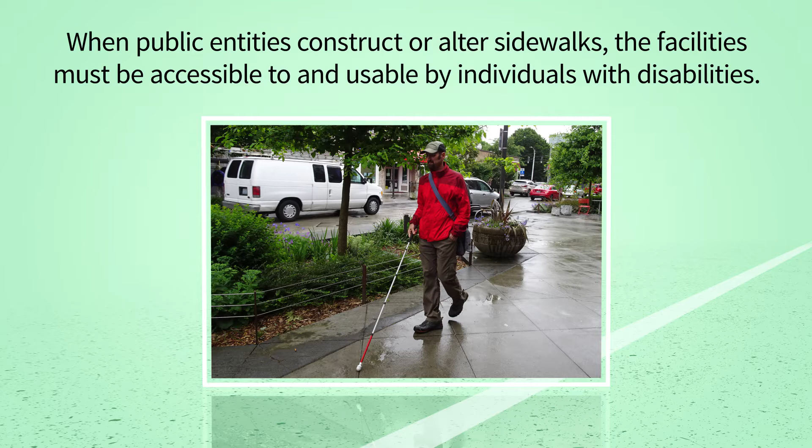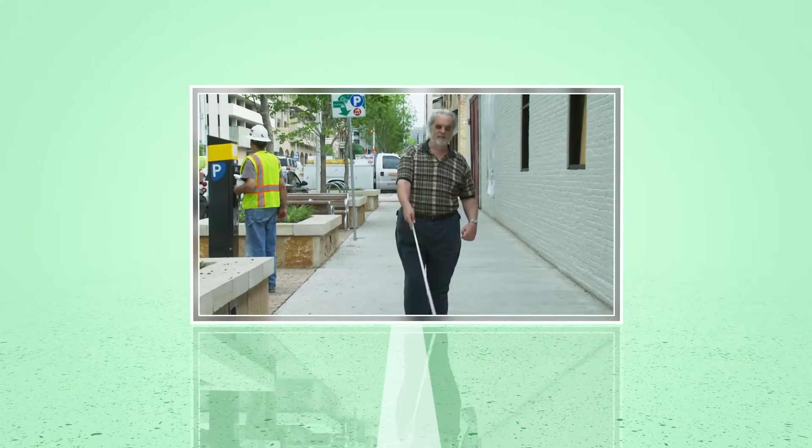When public entities, such as state or local governments, construct new sidewalks or alter existing ones, the ADA requires them to be accessible to and usable by individuals with disabilities. The ADA also requires the maintenance of accessible features so that accessibility is retained over time. ADA Title II regulations require that persons with disabilities are able to participate in state and local government programs, including sidewalks in the public rights-of-way and pedestrian crossings at intersections.

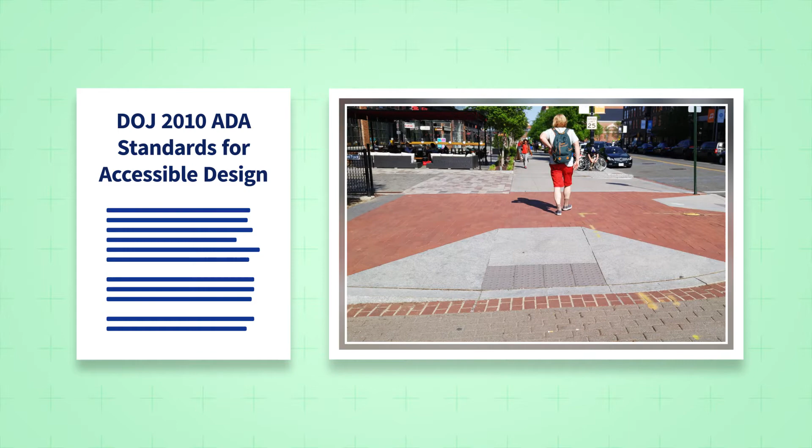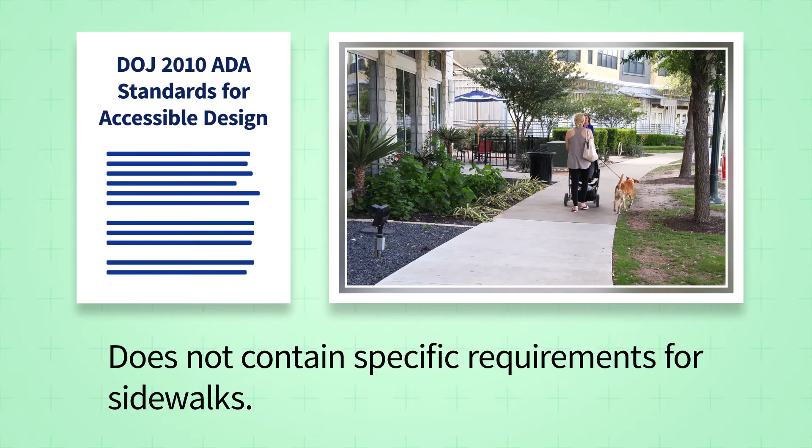The 2010 ADA Standards for Accessible Design issued by the U.S. Department of Justice, or DOJ, contain specific requirements for curb ramps at intersections. The ADA standards do not contain specific requirements for other elements in the public rights-of-way, such as sidewalks. However, under Title II of the ADA and Section 504, public entities must ensure that all their programs, activities, and services, including their public rights-of-way, are accessible to and usable by individuals with disabilities.

In the absence of specific technical standards for the other elements in the public rights-of-way, public entities have some degree of flexibility in determining how they will comply with the general accessibility obligation under Title II of the ADA and Section 504. Public entities may turn to different resources for guidance when determining how to ensure accessibility. For example, a public entity could look to the ADA standards for guidance on issues that arise in the public rights-of-way, such as sidewalks.

As another option, public entities may consider the U.S. Access Board's 2011 Proposed Accessibility Guidelines for Pedestrian Facilities in the Public Rights-of-Way, or PROWAG, which have been proposed as minimum guidelines for facilities in the public rights-of-way. Because these proposed guidelines have not yet been finalized by the Access Board and adopted by the DOJ or the U.S. Department of Transportation, they are not enforceable standards.

The draft guidelines may, however, provide a useful framework to help public entities meet their obligations to make their programs, services, and activities in the public rights-of-way readily accessible to and usable by individuals with disabilities. For that reason, the Federal Highway Administration considers the draft PROWAG a best practice for the design and construction of sidewalks, pedestrian facilities, and other elements in the public rights-of-way. There are 5 key elements in PROWAG that pertain to sidewalks: width, cross slope, grade, surface, and protruding objects.

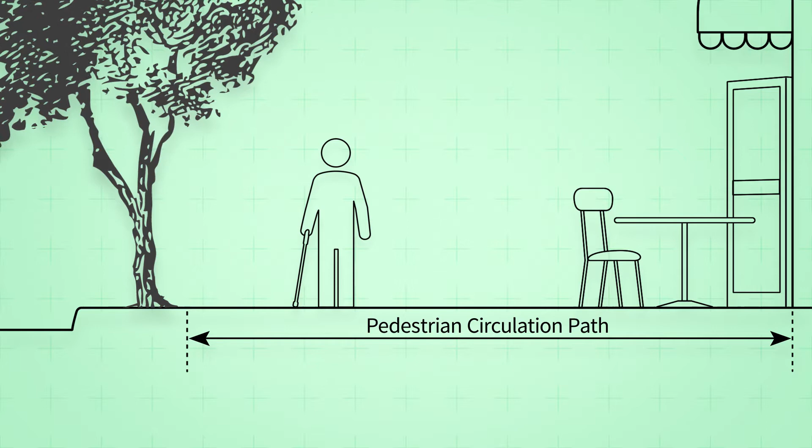A few of the sidewalk provisions of PROWAG, particularly those that address accessibility for individuals with limited vision, pertain to the entire pedestrian circulation path, which is the full width of the sidewalk that provides access to public transit, commercial centers, entertainment venues, and other places where people want to go. All the sidewalk provisions pertain to the portion of the pedestrian circulation path known as a pedestrian access route, or PAR. The PAR provides a continuous, unobstructed route for pedestrians with disabilities, including individuals who use wheelchairs or other mobility devices.

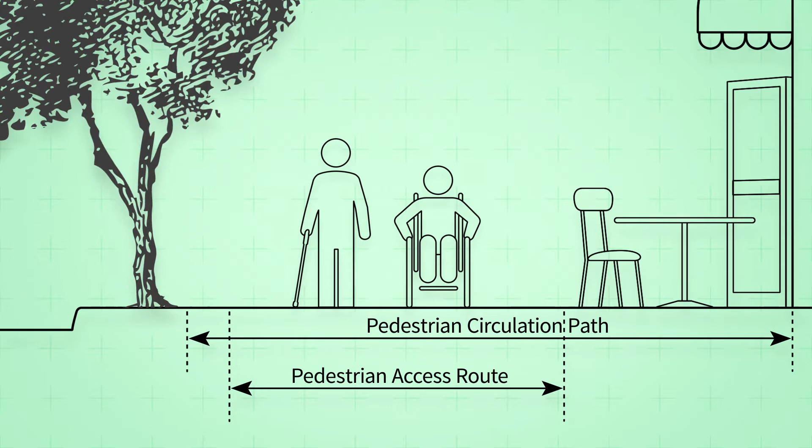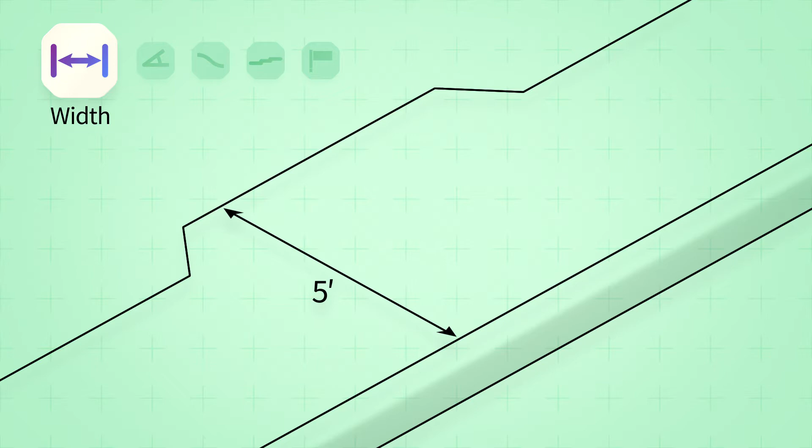To begin, the PROWAG proposes that the PAR must be at least 4 feet wide to accommodate individuals using a wheelchair, crutches, or walker. This width is measured excluding the curb. A 5-foot wide passing area should be provided at no more than 200-foot intervals. For a uniform appearance and ease of construction, the Federal Highway Administration recommends a minimum sidewalk width of 5 feet. Wider sidewalks are preferred to accommodate crowds, to allow space for 2 wheelchairs to pass each other, and when the sidewalk is located immediately adjacent to the curb.

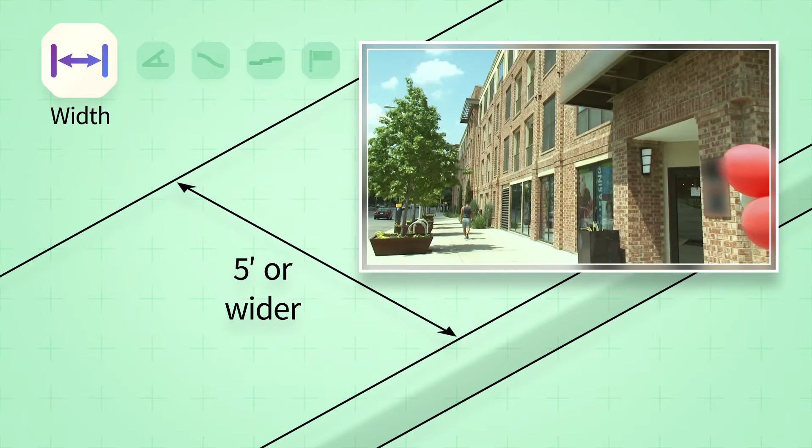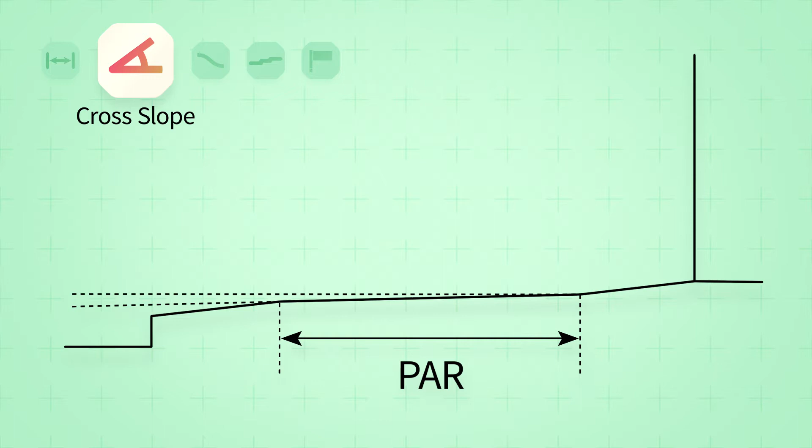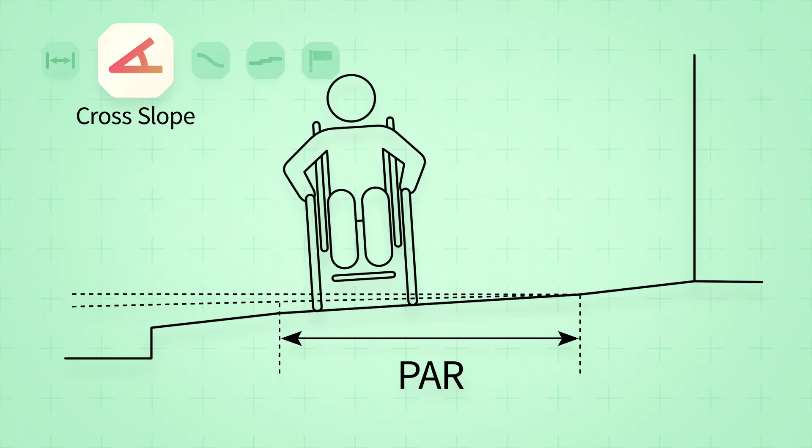Next, the PROWAG proposes that the maximum allowable cross slope of a PAR is 2%. The portion of the pedestrian circulation path outside the PAR, however, may have a steeper but generally uniform cross slope. While some slope is necessary for drainage, a cross slope steeper than 2% causes some pedestrians with disabilities to veer to the downhill side, making travel more strenuous for individuals using manual wheelchairs, crutches, and walkers.

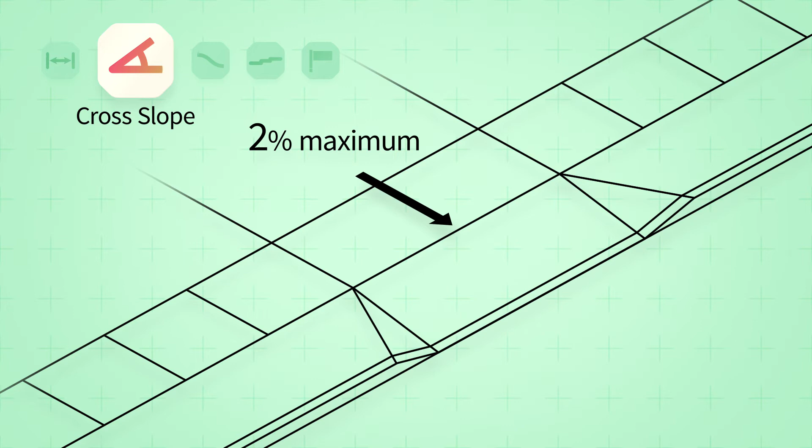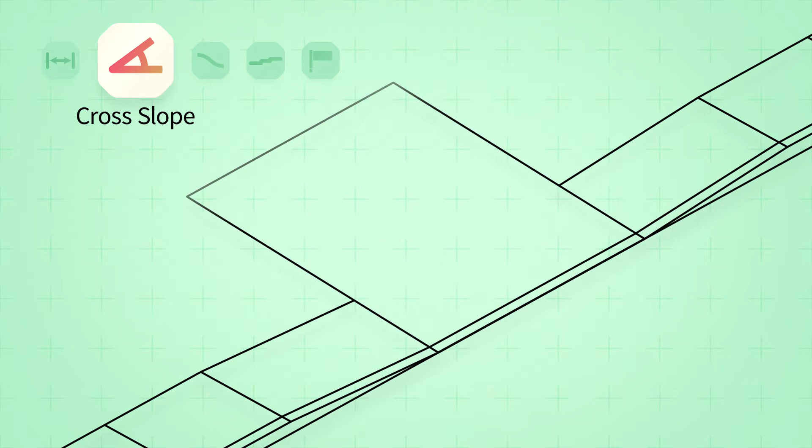Driveways that cross the PAR can create a barrier to accessibility if not designed and constructed properly. The driveway interface with the sidewalk can be addressed in a variety of ways. For example, if the sidewalk is set back from the curb, creating a PAR across the driveway meeting the 2% cross-slope provision becomes easier. However, where the sidewalk is attached to the curb, the sidewalk should be offset at the driveway to cross above the driveway apron, or the entire sidewalk and driveway apron may need to be lowered to nearly street level. Pay careful attention to drainage with this lowered design. By incorporating accessibility provisions into the driveway permitting process, public entities can avoid potential legal challenges and costly rework.

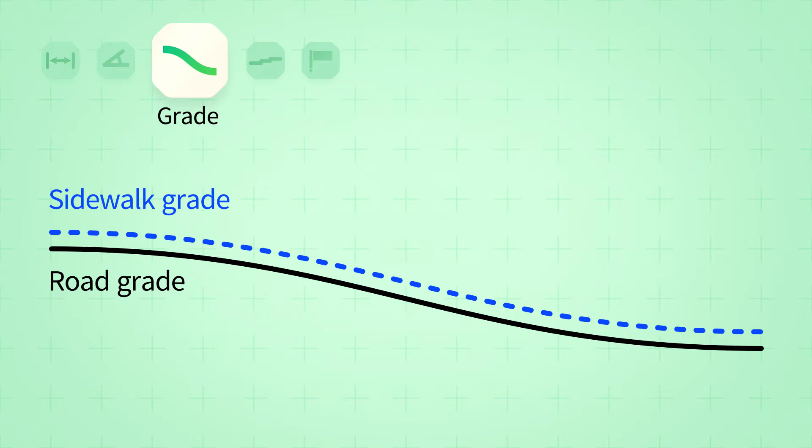Third, the PROWAG proposes that when a sidewalk runs parallel to a road, the grade or running slope of the PAR can follow the grade of the roadway. However, in all other cases, including built facilities such as pedestrian overpasses and underpasses, the maximum grade allowed is 5%, unless an alternative PAR such as a ramp, elevator, or platform lift is provided.

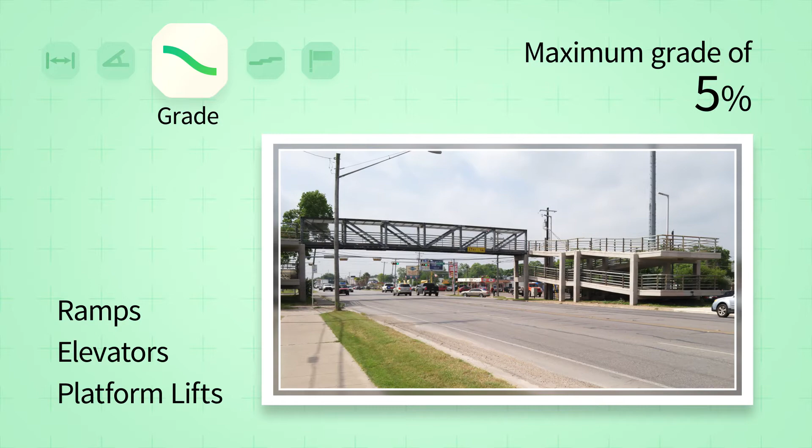Public entities may provide stairs in addition to the PAR. However, use of the PAR should not result in a substantially longer travel distance. Fourth, the PROWAG proposes that the surface of the PAR must be firm, stable, and slip-resistant.

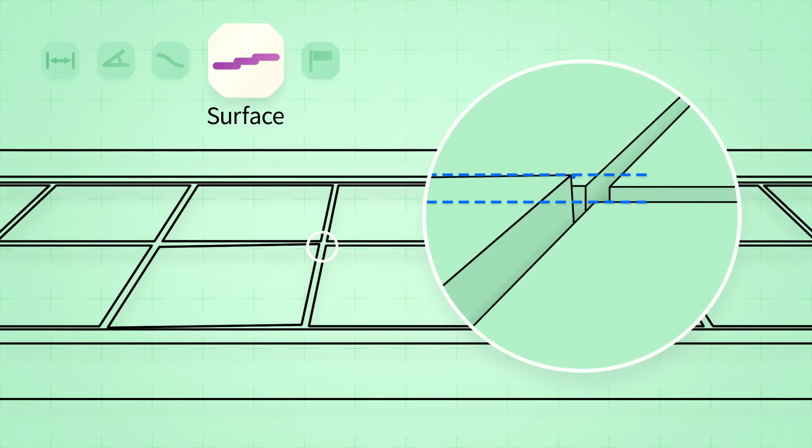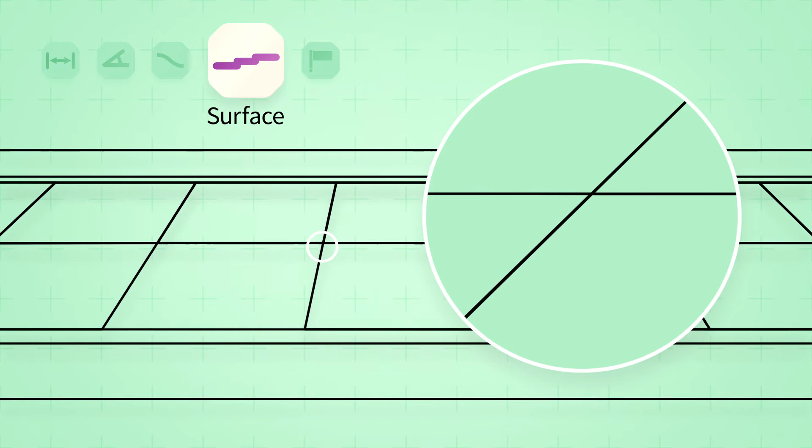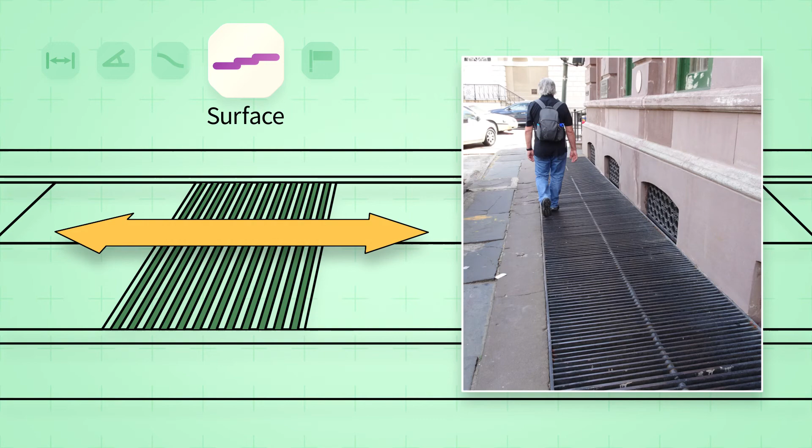The PROWAG proposes additional surface guidelines for the PAR, including vertical changes in level cannot be more than 1/4 inch. Changes in level more than 1/4 inch must be beveled or ramped. Grade breaks must be flush. Grates and joints must prevent a sphere of 1/2 inch in diameter from entering, and any elongated openings must be set perpendicular to the dominant direction of travel.

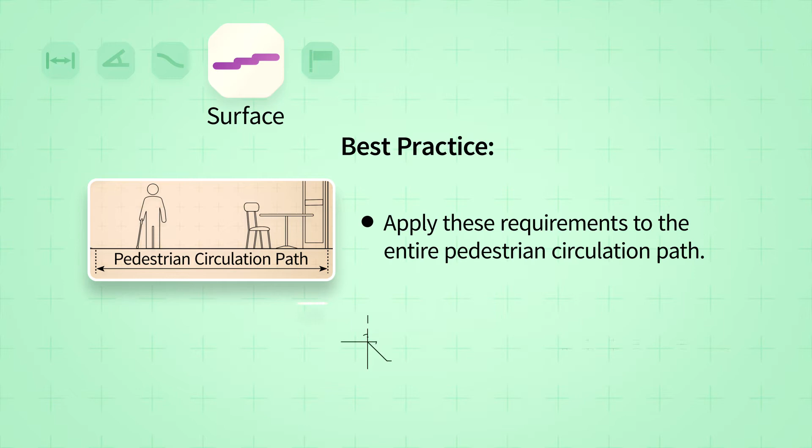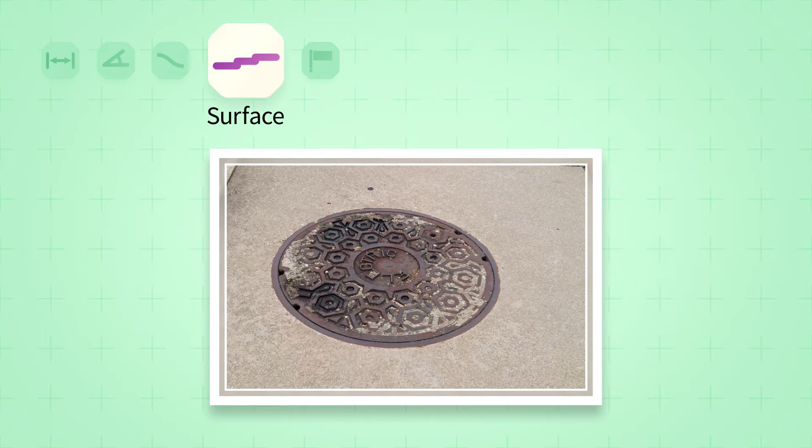While not required, it's a best practice to apply these surface provisions to the entire pedestrian circulation path and locate utility covers, vault frames, and gratings outside the PAR where possible. If these elements are located in the PAR, the surface provisions, including the 1/4 inch maximum change in level, apply.

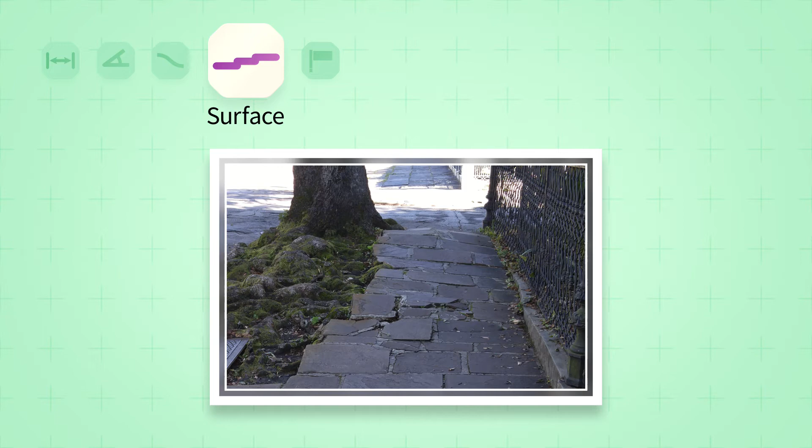The ADA requirement to maintain accessible features is particularly important in the PAR as soils shift and tree roots develop. Some public entities restrict use of decorative pavers to outside the PAR to reduce the potential for vertical changes in level.

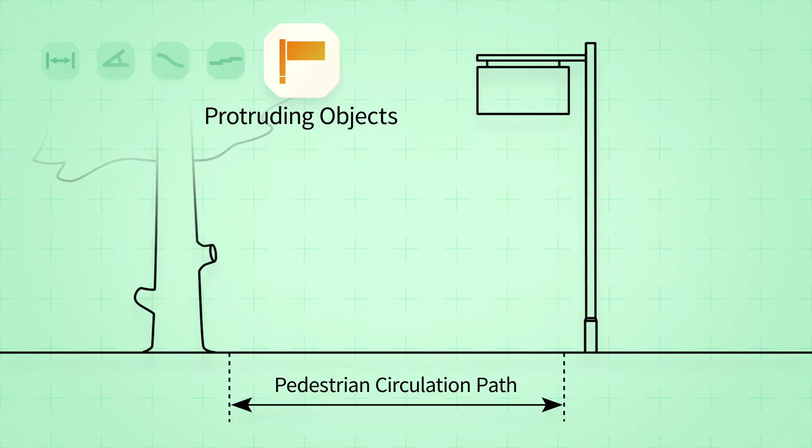Fifth, protruding objects are problematic for pedestrians with vision disabilities. Therefore, the PROWAG proposes that the entire pedestrian circulation path be free of objects that protrude into the circulation path from overhead or the side, such as tree limbs, objects attached to utility poles, and signs. When such objects cannot be avoided, public entities should make them detectable by individuals with vision disability.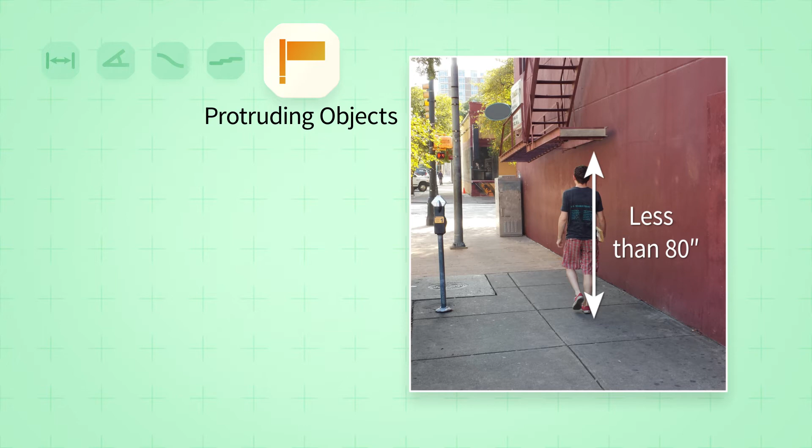Overhead items that are less than 80 inches above the walking surface cannot be detected by a pedestrian using a white cane. Where such objects cannot be relocated, guardrails or other barriers with a leading edge no higher than 27 inches should be used. Likewise, a pedestrian using a white cane will not detect an object that protrudes into the circulation path at a height of 27 to 80 inches above the surface of the sidewalk.

The PROWAG proposes that such objects protruding from the side or from a post into the circulation path by more than 4 inches must be made detectable by adding a base at least 2.5 inches high that reduces the protrusion to 4 inches or less as measured from the base.

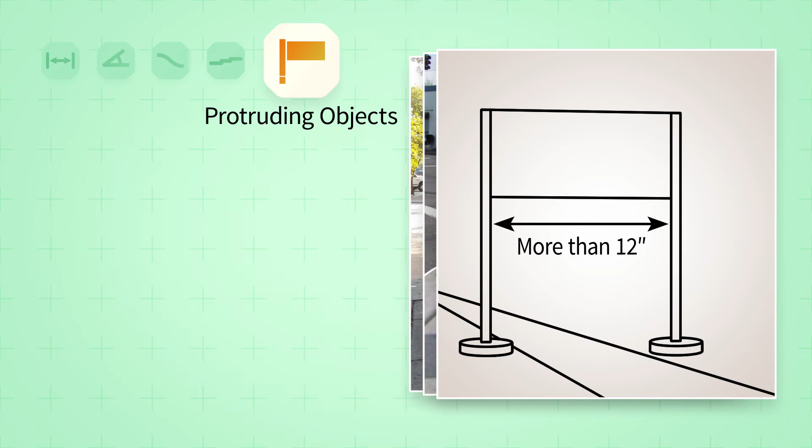And when a sign or other object is mounted between two posts, separated by more than 12 inches, the PROWAG proposes that the bottom of the object must be either lower than 27 inches to be detectable or more than 80 inches above the sidewalk for head clearance. An alternative to installing protective barriers or detectable bases is to relocate objects that fall in the 27 to 80 inch height range.

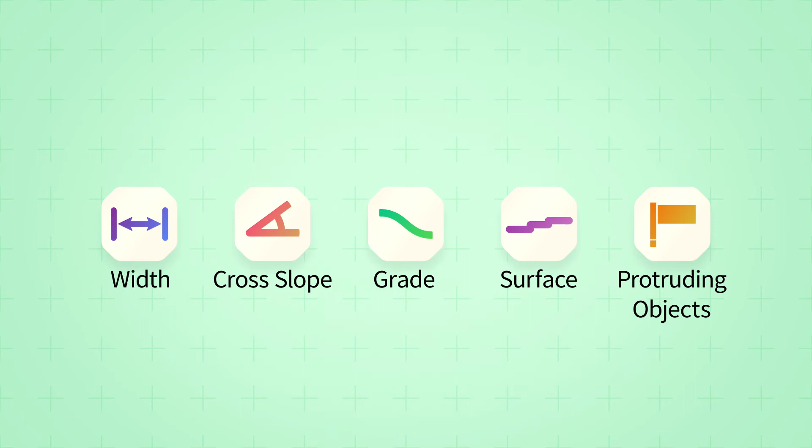Let's see how one public entity, which chooses to follow the PROWAG, approaches the reconstruction of a deteriorated public roadway that provides access to a baseball stadium. The roadway is also used by the public bus system and is located in a commercial area. At the project's onset, the engineer hosts a public meeting to get input from the community and learns the public's concerns about the lack of sidewalks and landscaping and inadequate lighting.

Following the public entity's design manual, the project engineer redesigns the corridor to provide a sidewalk for pedestrians. While she would like to provide more, the engineer designs a PAR that is 6 feet wide so 2 pedestrians can pass each other. To ensure the cross slope does not exceed 2% after construction, she specifies a cross slope of 1.5%, which is 0.5% less than the maximum set forth in the PROWAG.

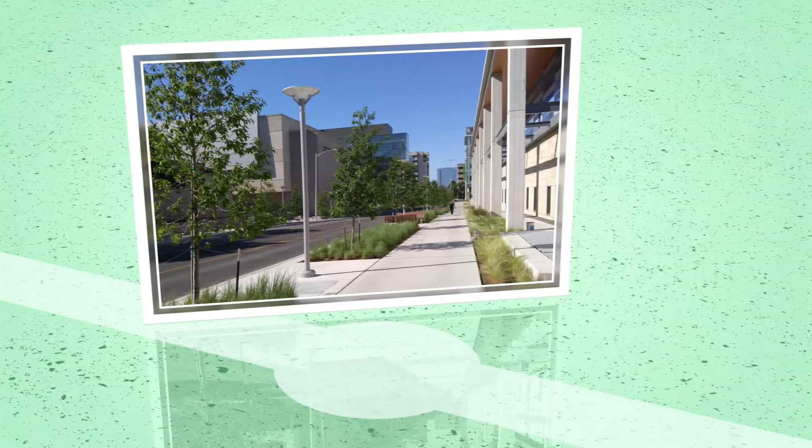She ensures that the PAR is continued across the commercial driveways, which must be rebuilt, and that all other accessibility needs are included. The plans also specify additional street lamps and landscaping. She consults with a landscape architect and includes plantings that will not need to be pruned back frequently to remove protruding limbs and will not damage the sidewalk as their root systems mature. She also makes sure that the street lamps and other street furniture do not create protruding objects, decreased headroom, or reduce the width of the PAR.

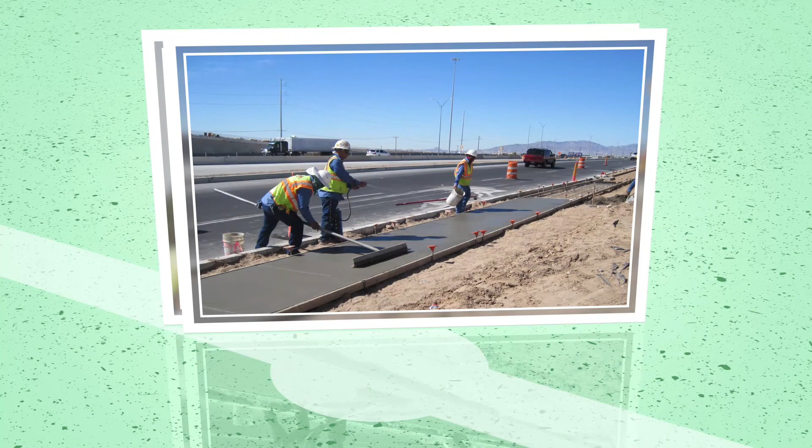Before construction begins, the project inspector meets with the contractor and reviews the width, cross slope, and grade requirements as well as the landscape plan. Before the concrete is poured, he reviews the forms and ensures that the design requirements are met. After the concrete is placed and throughout the project, he ensures that the facility is accessible.

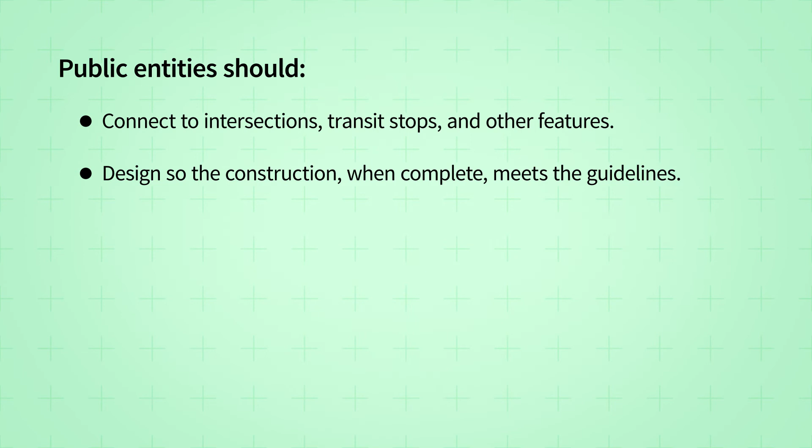As we have just seen, to ensure that its sidewalks in the public rights-of-way do not discriminate against individuals with disabilities, a public entity should provide accessible connections from sidewalks to intersections, transit stops, sites, and facilities. Design sidewalks so that slopes and dimensions meet the guidelines once construction is complete. Consider and plan for the cost of sidewalk maintenance over time when choosing surface materials, landscaping, and other design features.

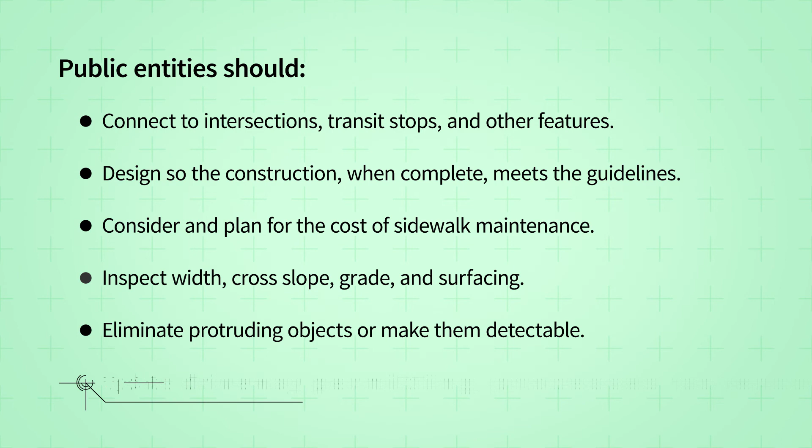Inspect sidewalk width, cross slope, grade, and surfacing during construction. Design, construct, and maintain sidewalks to eliminate protruding objects or make them detectable by a person using a white cane, and update driveway permitting processes to ensure that accessibility of the PAR is maintained.

There are many elements to consider when planning, designing, constructing, and maintaining pedestrian access routes that are accessible to users of all abilities. For additional information, review the 2010 ADA Standards, the PROWAG guidelines, and your entity's specifications, policies, procedures, and ordinances as they pertain to accessible sidewalk design. If you encounter a challenging situation or need further guidance, visit the Access Board's website or contact your state DOT or FHWA division.